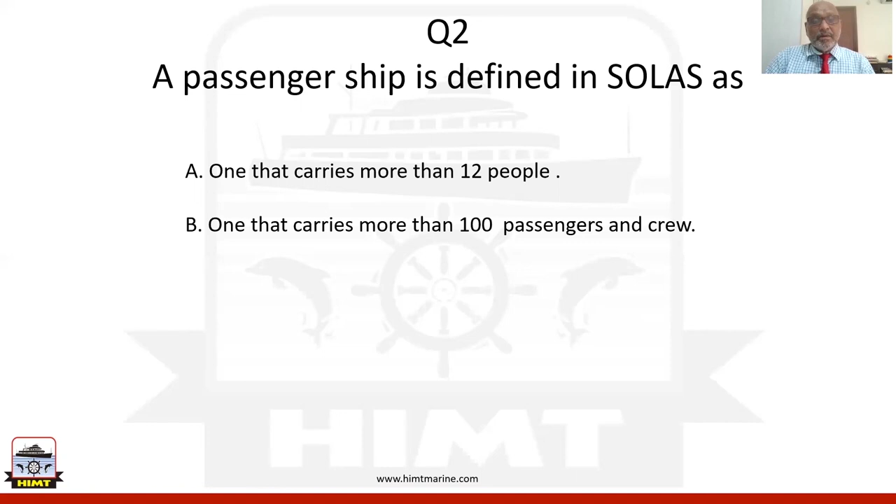And let's go to next question. The passenger ship is defined in SOLAS as one that carries more than 12 people, one that carries more than 100 passengers and crew, one that carries more than 36 passengers, and one that carries more than 12 passengers. Passenger ship is defined in SOLAS chapter 1 itself, where it's specified as a ship which carries more than 12 passengers. The right answer is option D, one that carries more than 12 passengers.

The passenger is also defined in SOLAS as anybody more than 1 year of age, also who is not engaged in the business of running the ship.

Let's go to question 3. Requirement for specific training for crew in a passenger ship is given in A. SOLAS, B. MARPOL, C. MLC, D. STCW. Training requirement is clearly defined in chapter 5 of STCW, where what are the training required for different types of ships is clearly specified.

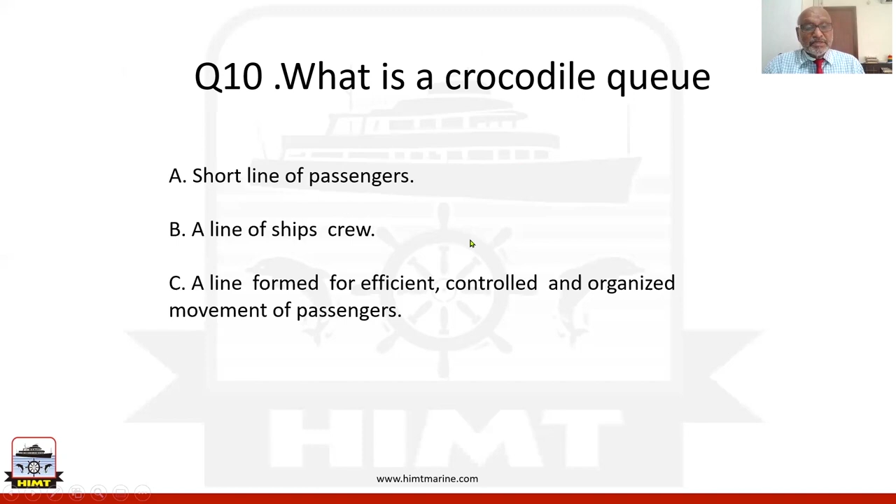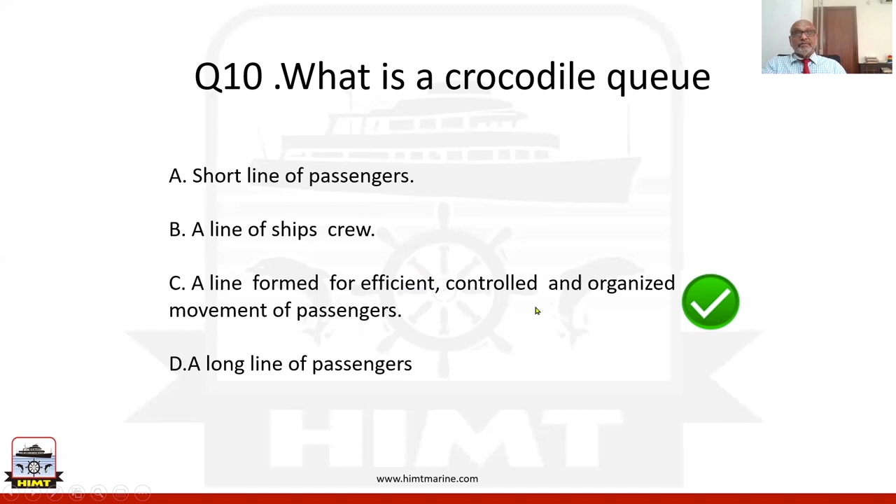Now, what is a crocodile queue? Is it a short line of passengers, a line of ship's crew, a line formed for efficient, controlled and organized movement of passengers, or a long line of passengers? The correct answer is option C. The reason being, a crocodile queue is recommended during emergency evacuation as it is the safest.

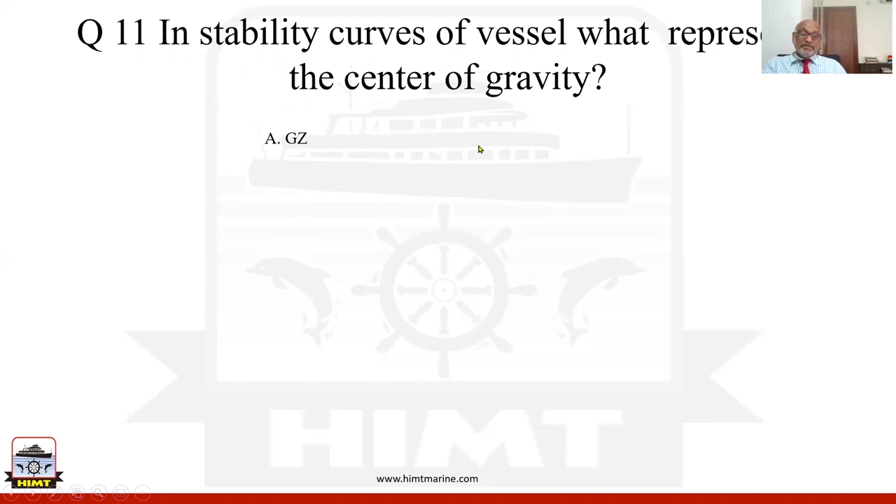In stability curves of a vessel, what represents center of gravity? Is it GZ? Is it M, metacenter? Is it B, center of buoyancy? Or is it G, center of gravity? Right answer is option D. GZ stands for righting lever. Let's go to question 12.

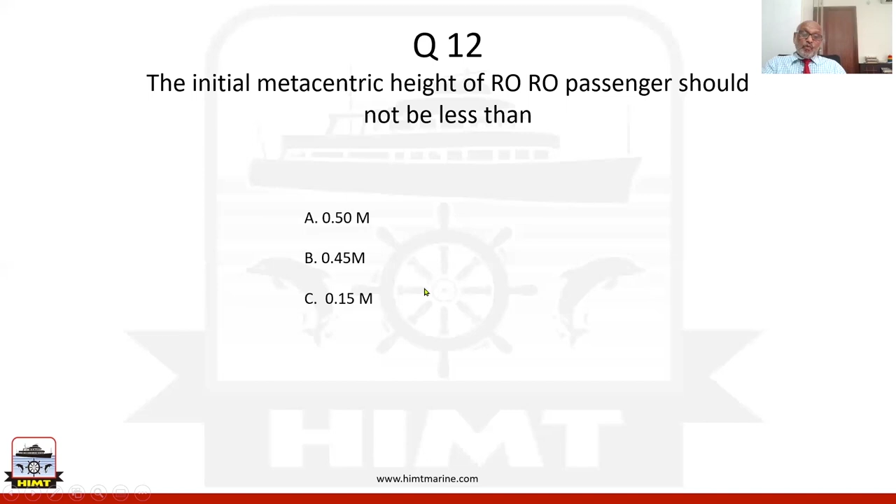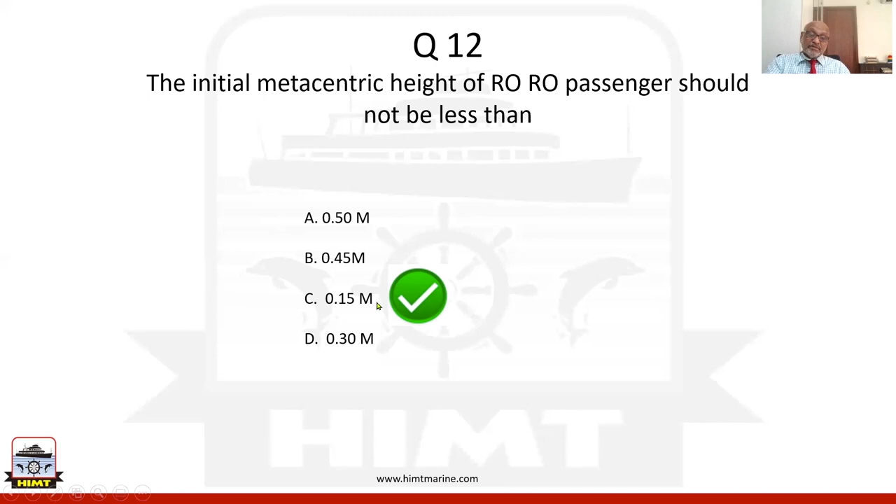The initial metacentric height of Ro-Ro passenger ships should not be less than 0.5 meters, 0.45 meters, 0.15 meter, or 0.30 meter. Again, the answer for this is option C, 0.15 meter. This is the minimum metacentric height recommended in cargo ships. Lower metacentric height can make the ship unstable. Similarly, higher metacentric height can also make the ship dangerously stable. So the right answer is 0.15 meter. Let's go to question 13.

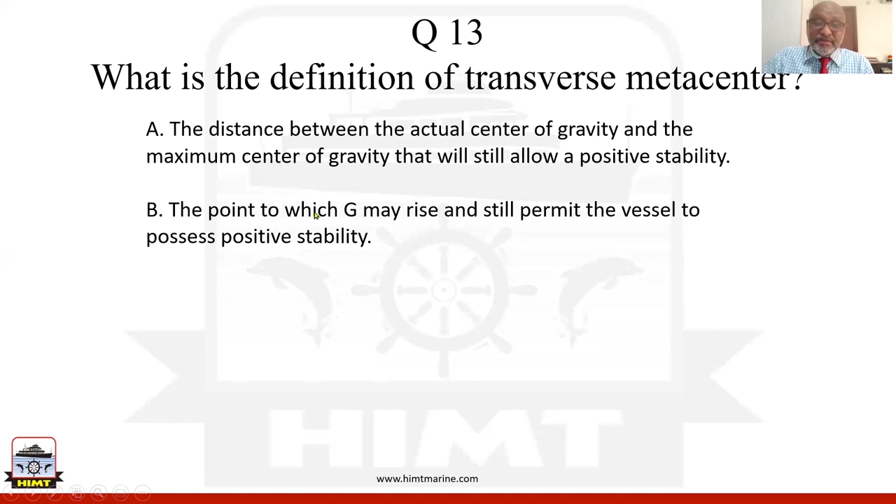What is the definition of transverse metacenter? Let's see the options. The distance between the actual center of gravity and the maximum center of gravity that will still allow a positive stability. Point to which G may rise and still permit the vessel to possess positive stability. Option C, the sum of center of buoyancy and center of gravity. And option D, the transverse shift of the center of buoyancy as the vessel moves. The right answer is option B.

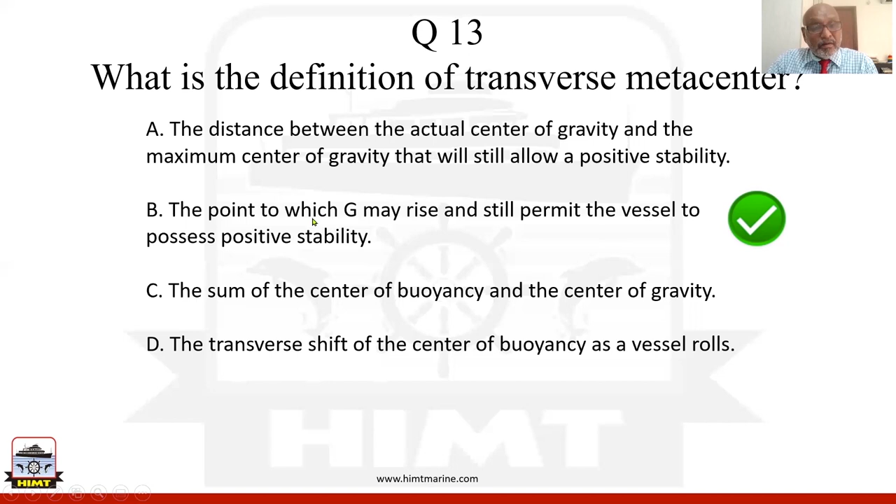G, or the center of gravity, should be below the metacenter to give the vessel a positive stability. So hence, G may rise up to M for the vessel to have a positive stability. So let's go to question 14.

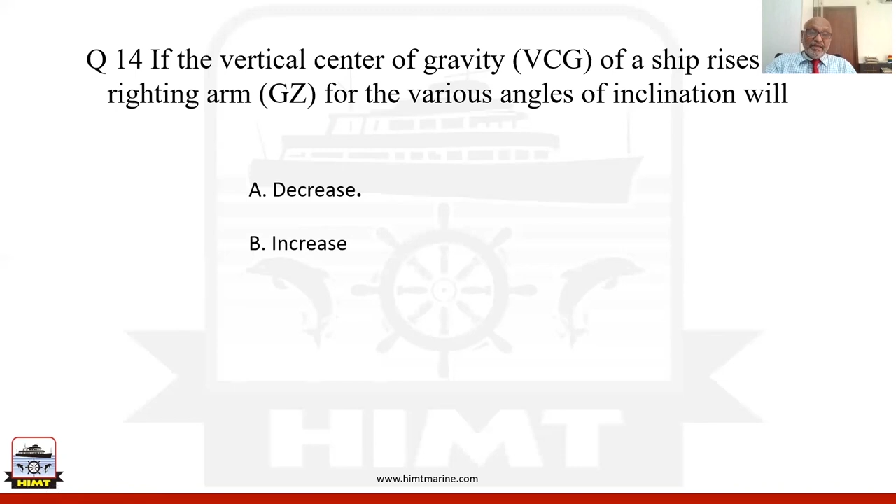If the vertical center of gravity of a ship rises, the righting arm GZ for various angles of inclination will A, decrease, B, increase, C, remain unchanged, and finally D, change by amount GG1 into cosine of the angle. So the right answer is option A. The reason being, if the center of gravity rises, the metacentric height GM will definitely decrease. The righting arm is GM multiplied by sine theta, or sine of the angle of inclination. So this also will correspondingly decrease. So option A is the correct answer.

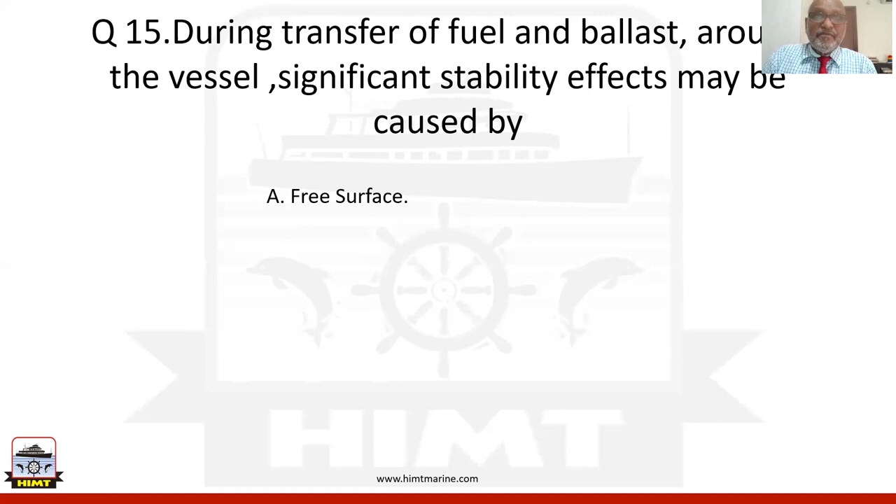So question 15. During transfer of fuel and ballast around the vessel, significant stability effects may be caused by A, free surface, B, panting, C, racking, D, excess strain. Correct answer is option A. As fuel and ballast are both liquids, they have free surface. And if they are allowed to flow freely, there could be a change in center of gravity of the vessel, and a stability effect can be caused by free surface effect. Hence, the right answer is A, free surface. Both panting and racking are stresses caused by external waves. Let's go to question 16.

A vessel is said to be sagged when: draft at midship is more than the drafts at forward and aft; draft at midship is less than the draft at the centre; draft at the center is equal to the draft at the ends; and finally, vessel is rolling due to heavy winds and cross waves. Sagging is caused when the middle of the vessel bends down more than the ends, increasing the draft at the center more than at the ends of the vessel. So the right answer is option A. Draft at midship is more than draft at forward and aft.

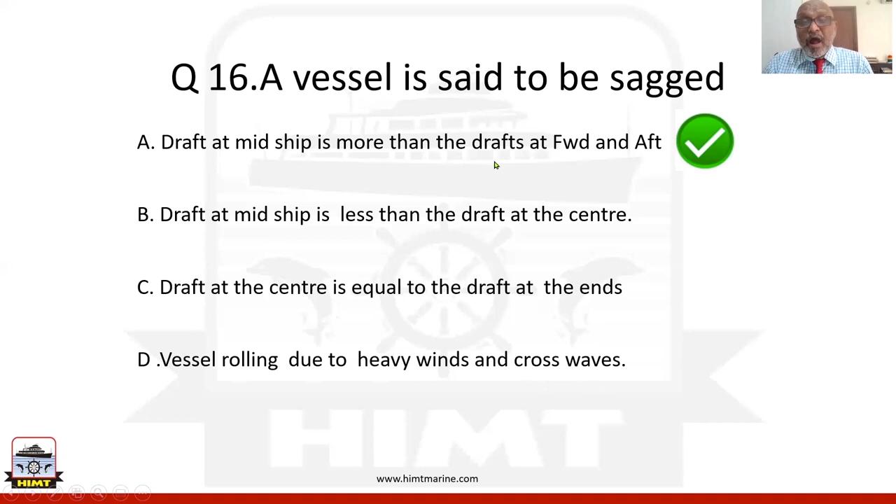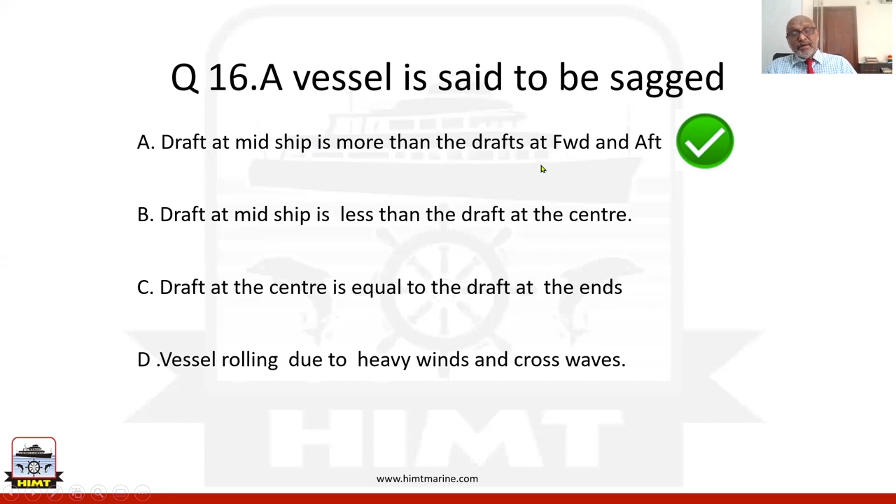So this is a dangerous situation. It can lead to cracks of the hull. It can happen because of wave action and uneven weight distribution of the vessel. Opposite to sagging is hogging, where the draft at midship is less than the draft at the ends. So here it is sagging. So the right answer is draft at midship is more than the drafts at forward and aft.

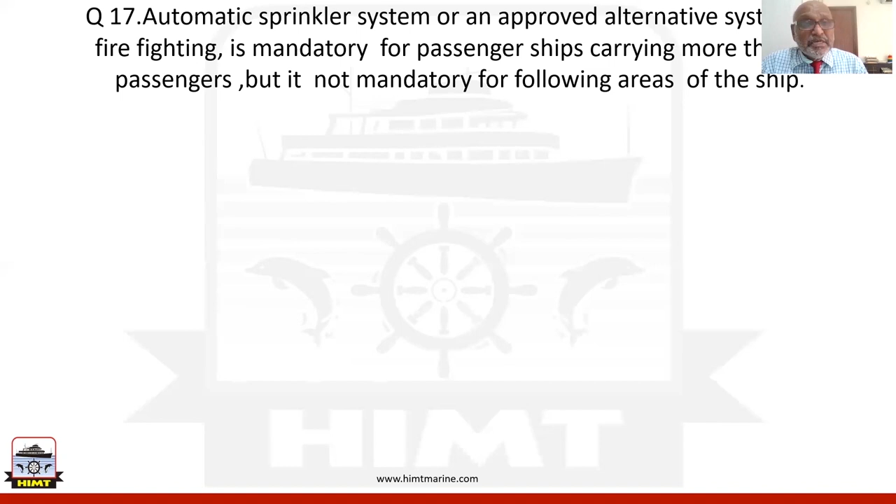Let's go to question 17. Automatic sprinkler system or an approved alternative system for firefighting is mandatory for passenger ships carrying more than 36 passengers, but is not mandatory for following areas of the ship. Where is it not mandatory? Is it control and service spaces? No. Accommodation spaces? No. Machinery spaces or corridors and lobbies? The right answer is machinery spaces, where sprinkler system is not mandatory, and this is specified in SOLAS chapter 2, section 2, where it deals with firefighting, detection and extinction.

Question 18. Maximum temperature at which sprinkler bulb should operate in accommodation area except drying rooms and saunas is A, 79 degrees, B, 68 degrees, C, 60 degrees, D, none of the above. So here the answer is 79 degrees.

FSS code, which specifies engineering specification for fire safety systems on ships, states that the automatic sprinkler system in accommodation and service spaces should be between 68 and 79 degrees. But where drying rooms and saunas are, it can be more. But in accommodation, corridors and alleyways, maximum allowed is 79 degrees.

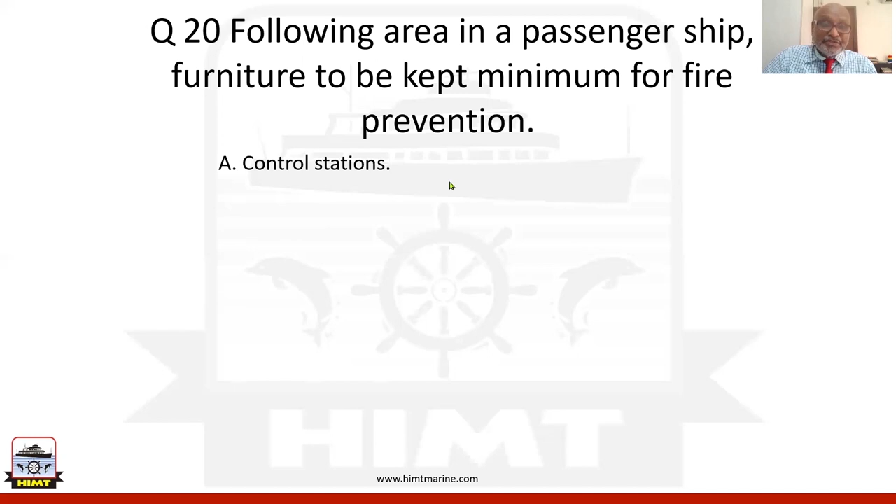Let's go to question 20. Following areas in a passenger ship: furniture to be kept minimum for fire prevention. Is it control station, B, service spaces, escape routes, or stairway enclosures? The right answer is stairway enclosures. The reason being, again, specified in SOLAS, chapter 2, part B, prevention of fire and explosion. Regulation 15 says that furniture in stairway enclosures is to be fixed, limited to seating, and should not restrict the escape route of passengers. Hence, the right answer is option D, stairway enclosures.

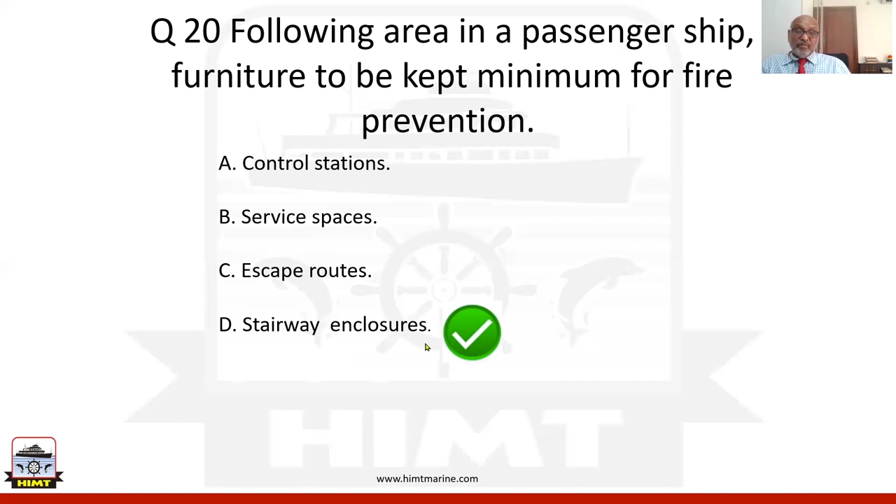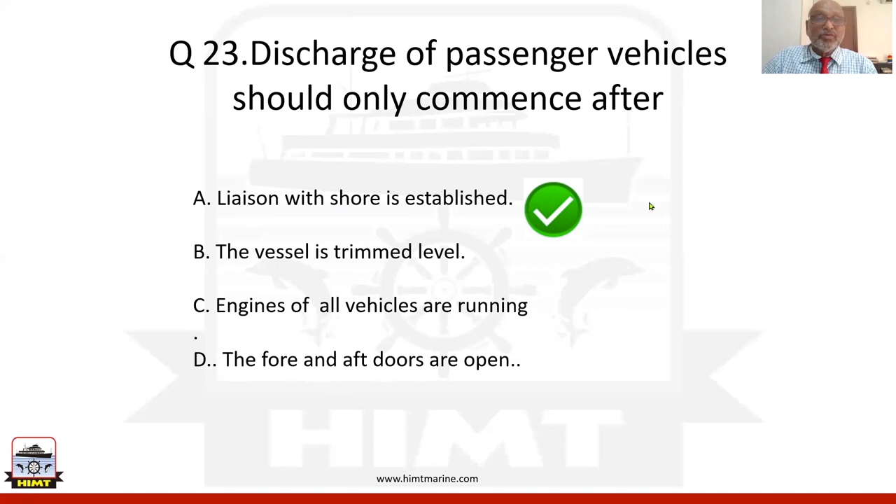Question 25. During loading, a trailer carrying dangerous goods is seen to be leaking. Your immediate action would be: send it ashore, advise the master, seek further advice from shipper, or stow separately and inform the shipper. Right answer is send it ashore.

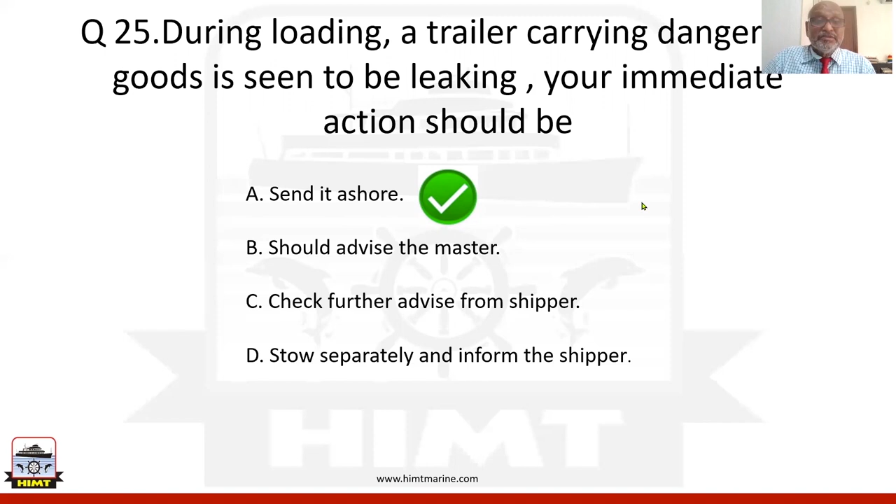Okay. We don't want any leaking dangerous goods inside the car spaces. So immediate action should be taken, and that is send it ashore. Let's go to question 26.

Passenger ships over 500 gross tonnage shall carry: at least one rescue boat on either side; one rescue boat on any side; one rescue boat at stern; no need of a rescue boat, as any lifeboat can be a rescue boat. The right answer is one rescue boat on either side.

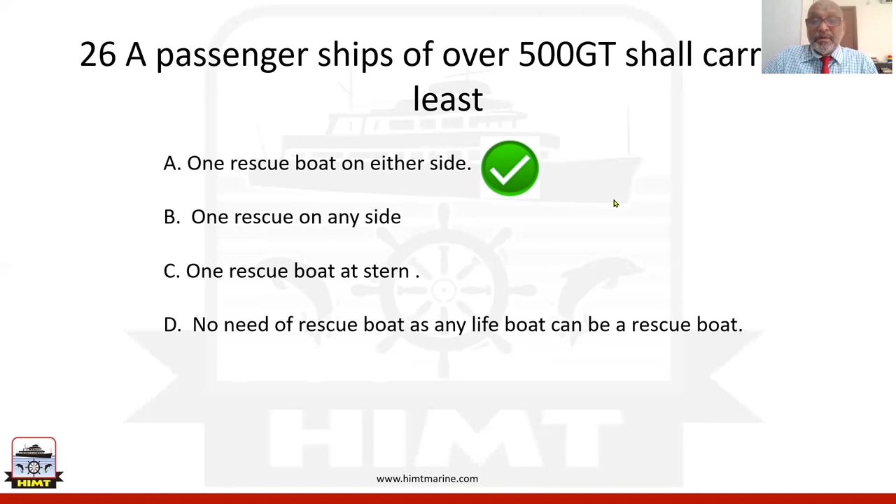This is again a SOLAS regulation, chapter 3, where requirements of LSA equipment are specified. So this is one rescue boat on either side. If it is less than 500 gross tonnage, we require only one rescue boat on any side. A lifeboat, of course, cannot be used as a rescue boat. Let's see what is in store in question number 27.

A drogue: a heavy metal anchor intended to stop the vessel at sea; a conical or funnel-shaped device with open ends used to slow down the wind effect on a boat; a pad eye on the boat to which the sea anchor is made fast; an anchor made of wood used to reduce the speed of the boat at sea. The right answer is option B.

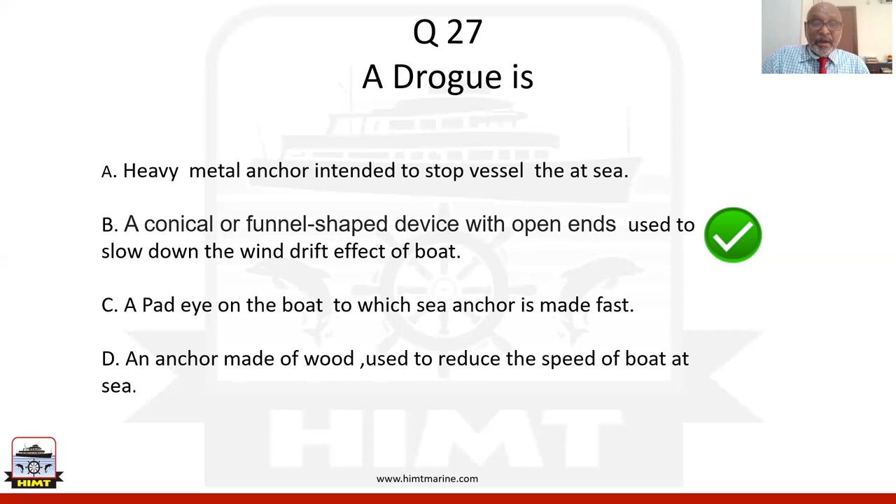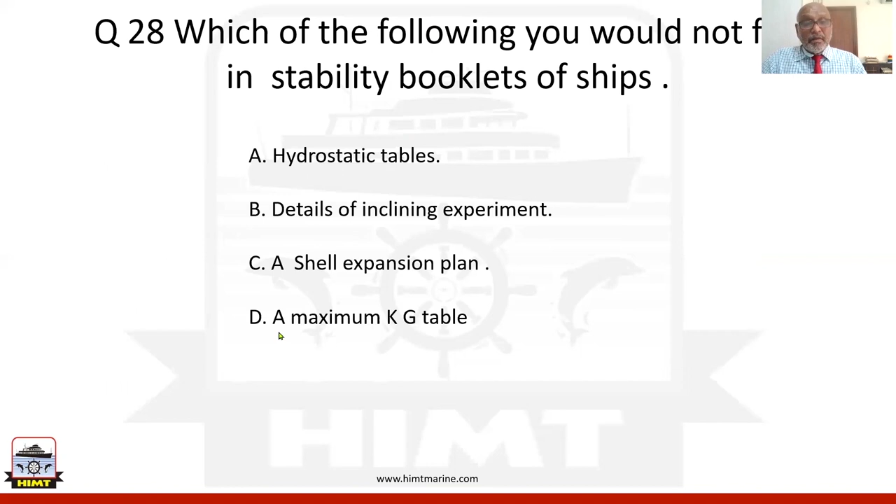Again, a drogue, also known as a sea anchor, is used in lifeboats and life rafts to reduce the effect of wind on the survival craft. So let's go to question 28. Which of the following would you not find in stability booklets of ships? Hydrostatic tables, details of inclining experiment, shell expansion plan, maximum KG table. The right answer is shell expansion plan.

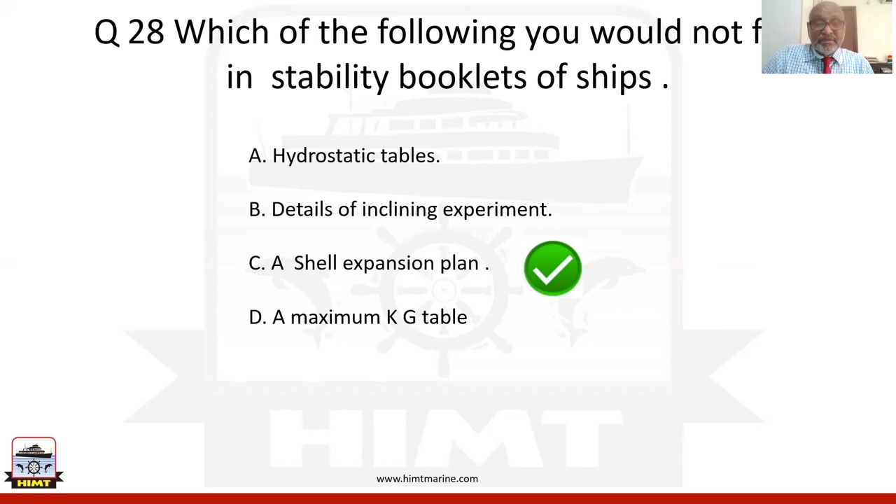The reason being, all others are required for calculating the stability of the ship, but the shell expansion plan gives details of the steel plates used for building the hull of the ship. So that is not required for calculating the stability of the ship. That is needed when you want to change the hull plates. Well, let's go to question 29.

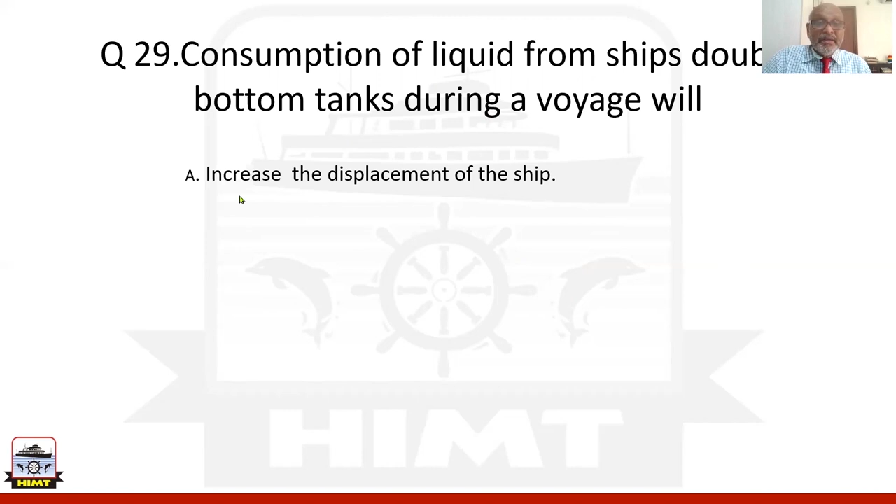Consumption of liquid from ship's double bottom tanks during a voyage will: increase the displacement of the ship, decrease the KG, make the ship stiffer, increase the KG. So what is the right answer? Why increase the KG? KG is indicating the distance between the keel and the center of gravity.

So when you are consuming from your double bottom tanks, which are at the bottom of the ship, the center of gravity will rise. So the distance between the keel and center of gravity will increase. The right answer is option D. Let's go to the last question.

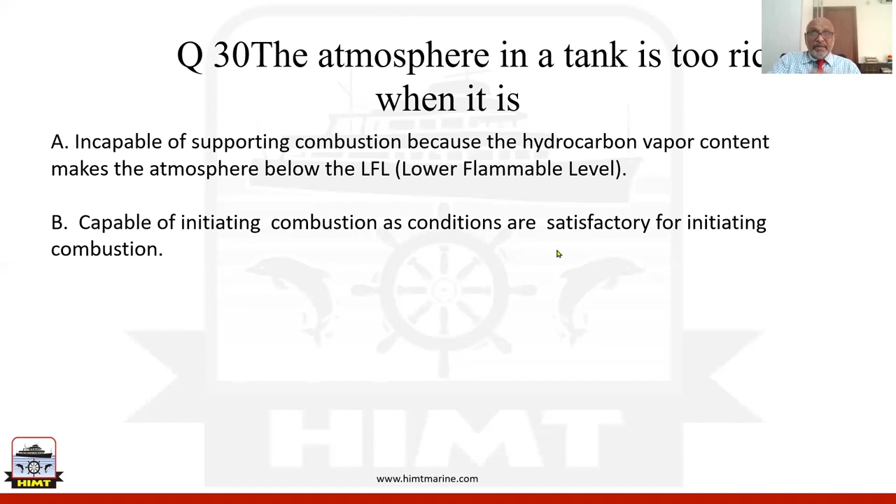Question number 30. The atmosphere of a tank is too rich when it is: incapable of supporting combustion because hydrocarbon vapor content makes the atmosphere below LFL or lower flammable limit; capable of initiating combustion as conditions are satisfactory; incapable of sustaining fire as flame cannot pass through hydrocarbon vapor; or incapable of supporting combustion because sufficient oxygen is not available, with hydrocarbon vapor content above UFL or upper flammable limit.

So here the question is the tank is too rich. Too rich means the hydrocarbon vapor is above the upper flammable limit. And it is incapable of supporting combustion because oxygen is not sufficient. The right answer is option D. Incapable of supporting combustion because sufficient oxygen is not available.

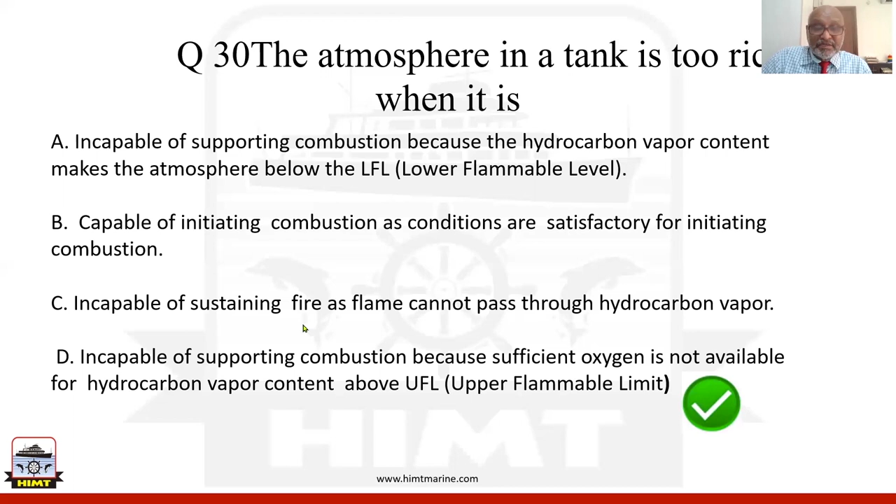Okay. Option C is incorrect as flame can pass through hydrocarbon vapor. Option B is also incorrect as any mixture too rich cannot start combustion. And option A is incorrect as an atmosphere below LFL is not rich and will not initiate combustion. The right answer is option D. So that concludes the session.